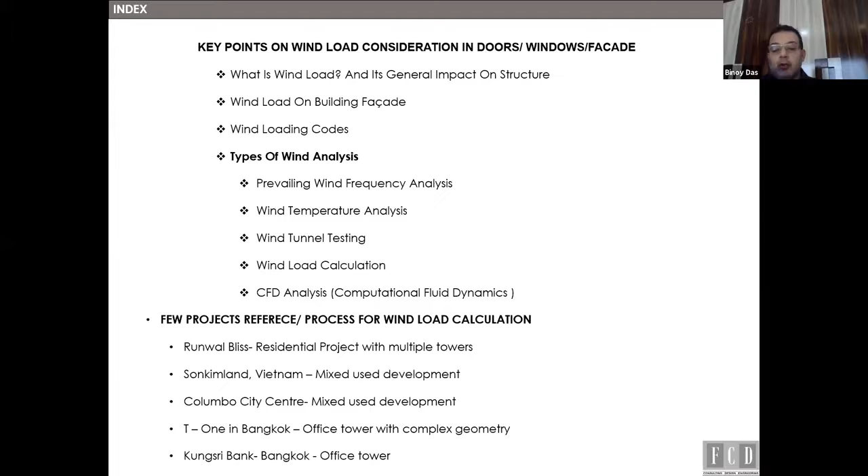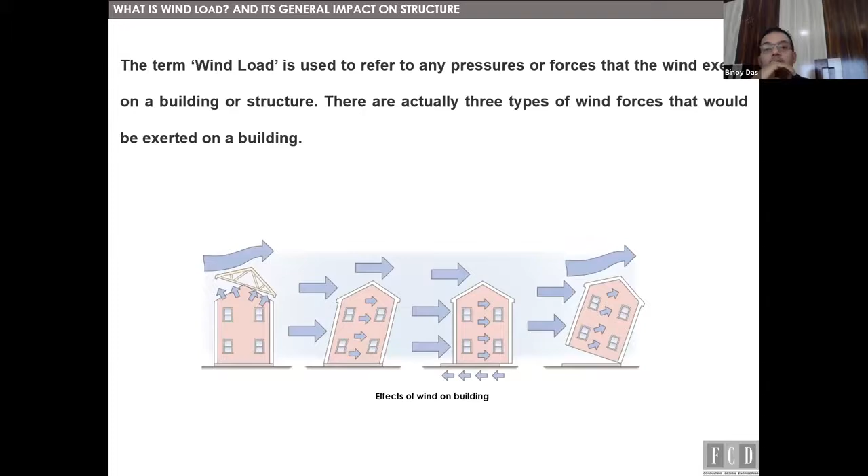So first, I would like to just quickly get through what wind load is as a definition. It's a pressure or force that the wind exerts on buildings or structures. As we are all aware, there are different types of wind action: uplift wind load, shear wind load, and lateral wind load.

How does uplift wind load work, what are the factors, and what are the areas where uplift wind load has to be considered? For example, with a building with a roof, a canopy or dome structures, how the uplift wind load reacts and the behavior of the wind load has to be studied. Secondly, shear wind load. If you look at the diagram here, the shear wind load is the horizontal pressure or force that can act on the wall or vertical elements. So these are different cases we need to consider when we calculate the wind load.

Lateral wind load is mostly on the structures, but of course there's the facade, when you talk about a continuous facade that's integrated and connected to the building structure. So these are certain factors we are aware of. But I just touch on these lines to give an idea that the calculation of wind load is not only a theoretical calculation; there are different elements required to be considered when designing the right wind load of a building, and that is required by the facade systems.

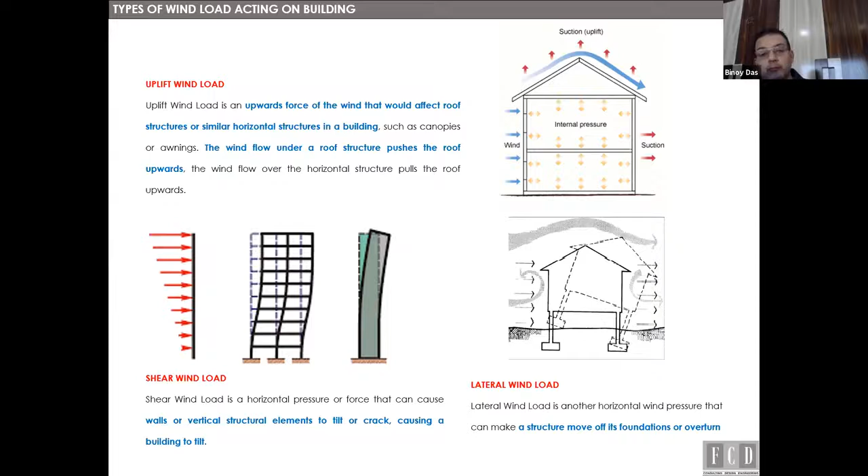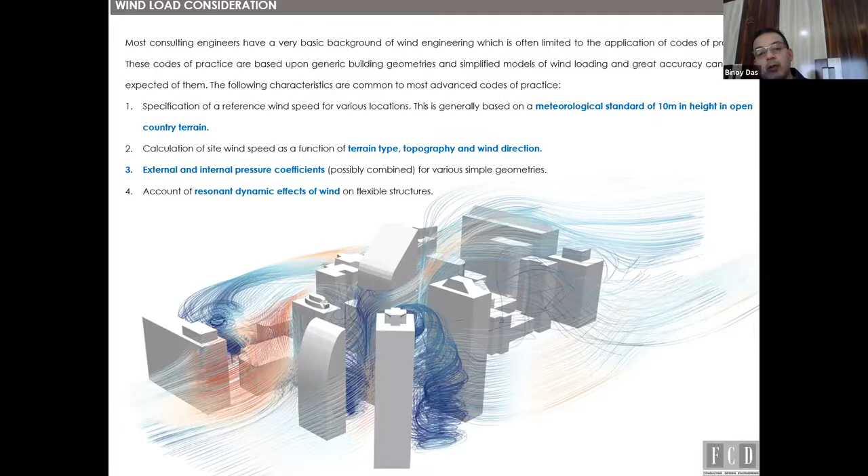Okay. Let's say the nature and occurrence of high winds. For example, in the high wind performance of office towers, a large part of the poor performance of the envelope is due to inadequate design. Sometimes when we design the facade, if the wind load calculations at certain heights or certain areas are inadequate or not proper, there is a lot of chance of failure in the facade systems: structural failure, water leakage, and many other failures which can cost the project owner, the building owner.

So while designing the facade, the wind load calculations, the different criteria and categories, and the factors required for those conditions and locations are important. That's why I wanted to highlight that when you design for wind load, the design should gather all relevant factors in terms of wind temperature, prevailing winds, and how wind tunnel testing helps, which I will come to in the next slides.

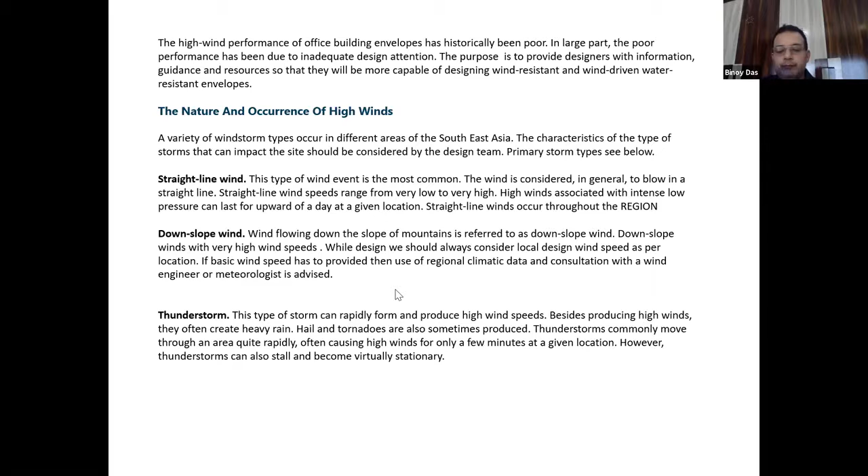For example, in hurricane conditions, there's a system of spiraling winds converging with increased speed towards the storm center, during hurricanes or typhoons. For example, in the Philippines, whenever a building is designed, I guess there are more than 15 to 16 typhoons there.

So while designing the facade, we have to get the data or information from the local code of practice, and discuss with the structural engineers how their structures are designed, because the facade is a part of the structural building elements. So it's the whole movement of the building with the facade. So during a typhoon, what are the different conditions that need to be applied while calculating the wind load?

For example, in normal areas where the wind speed is not much, like Bangkok, the wind speed is probably 25 meters per second. In those areas there are different options for a cost-effective design solution based on zoning of the wind load. But in a hurricane or typhoon zone, like in a few areas of the Philippines where tremendous wind load acts on the building, we have to go with the highest wind acting on the building. So the design should always be based on the highest wind load consideration.

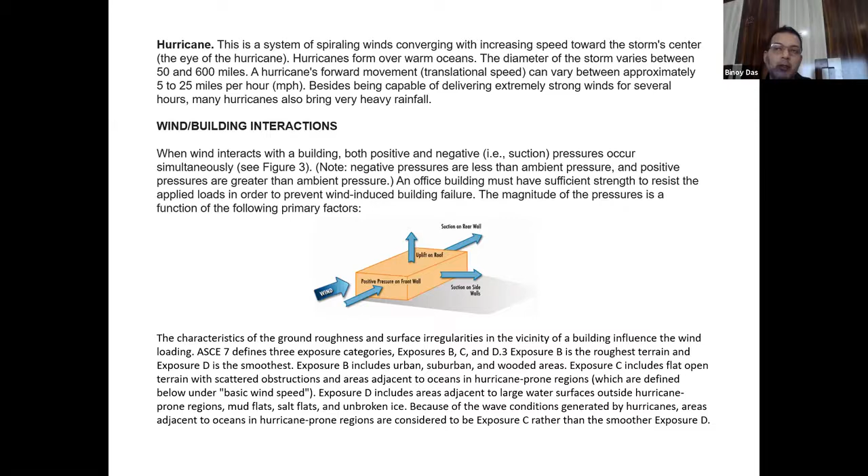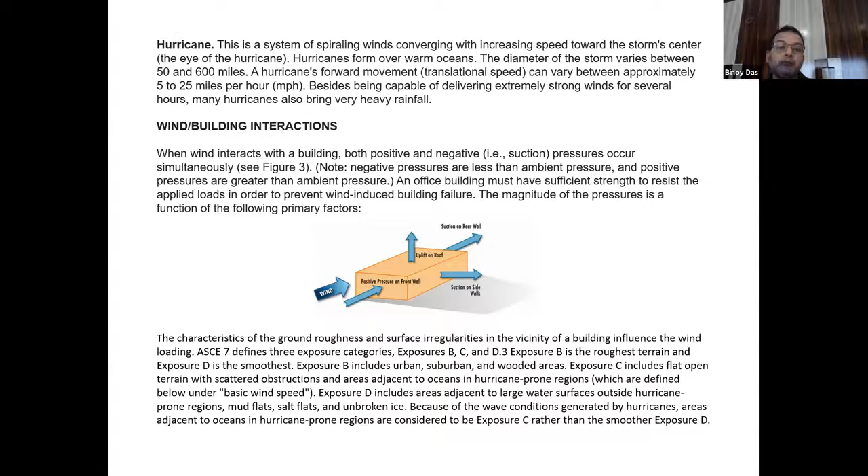So these are the generic ones. Why do we actually strongly recommend a wind tunnel test? Because there are different ways of calculating the wind load. There is a conventional way: we take the wind speed of, let's say in Thailand, Bangkok, 25 meters per second. So we take the 25 meters per second, we take the terrain condition, we take open or closed conditions and all the others as part of the code of practice. And then, as per the codes, we calculate the wind load.

But when you have a wind tunnel test, you get an accurate result of the wind coordinates acting onto the different areas. That's why I said wind pressure calculation is a significant factor in the design of the facade, especially for towers, whether office towers, shopping malls or residential. So any facade which is continuous, especially for a high rise, has to go through the wind tunnel test when there is a high rise or multiple towers clubbing together. That gives you the wind tunneling effect, the different kinds of coordinates.

But when it comes to the developer's mindset, when they ask how much a wind tunnel test costs, it mostly costs $35,000 to $40,000. So sometimes, to save that cost, they do not go for it. There could be different reasons also, but what we come across is: okay, we need to save the cost, so why can't we go for the other conventional way to design?

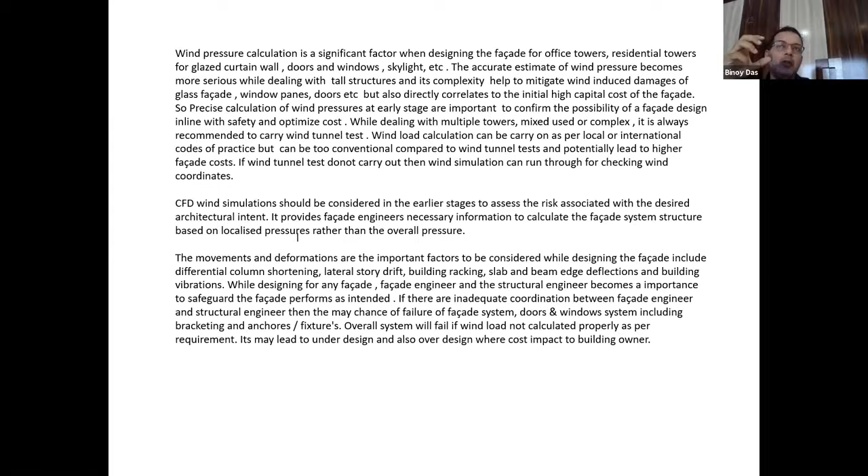We have to go with zoning where the wind acts at each level, maybe plus 10 meters, 50 meters, 100 meters or 300 meters. Different zoning where the wind acts on the surface conditions and on the corner conditions. So we have to take all the coordinates to come up with an understanding of how this facade will be designed, because the geometry of the facade or the building changes gradually towards the height of the building.

Now, as we all know, because of the facade designers, because all this practice, technology and analysis and software are available, the architects have a free hand to go for any kind of design complexity. So the complexity of the design is as per the architect's intent, as per the concept of the building.

We as designers have to make sure we achieve the intent, but also check whether the intent shown is structurally feasible in terms of safety, in terms of the system which is fixing onto the building, which is structurally adequate, where the building moves along and the facade also has to move with the building. There's an equal allowance of movements into the facade, which is a continuous or maybe a floor-to-floor glazing system.

So these are wind simulation methods: CFD wind simulation, then you have the wind tunnel test, and then the conventional way. We can go with any of the design methods, of course, but it's always better to go for a wind tunnel test if possible, because it carries on as a prototype to understand and give the correct results of the wind and the coordinates on that.

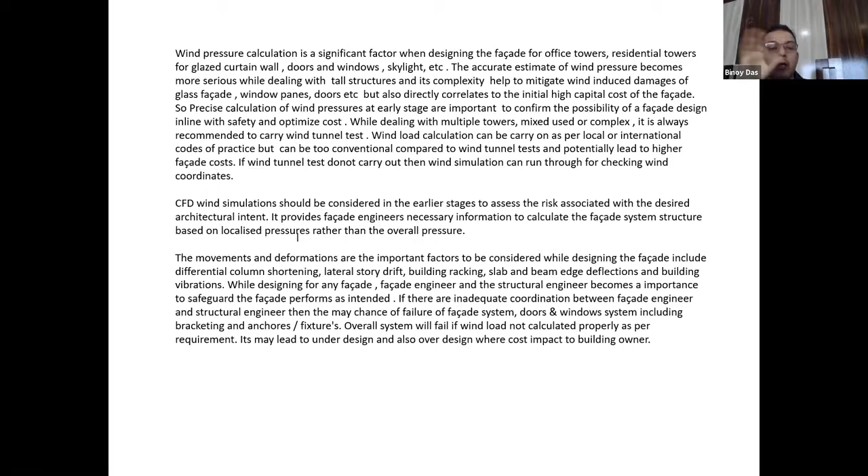So this is what I would like to present, and I'd like to convey this message of why wind load calculations with different types of analysis factors are important. Also, for the wind calculation, we go through the code of practice.

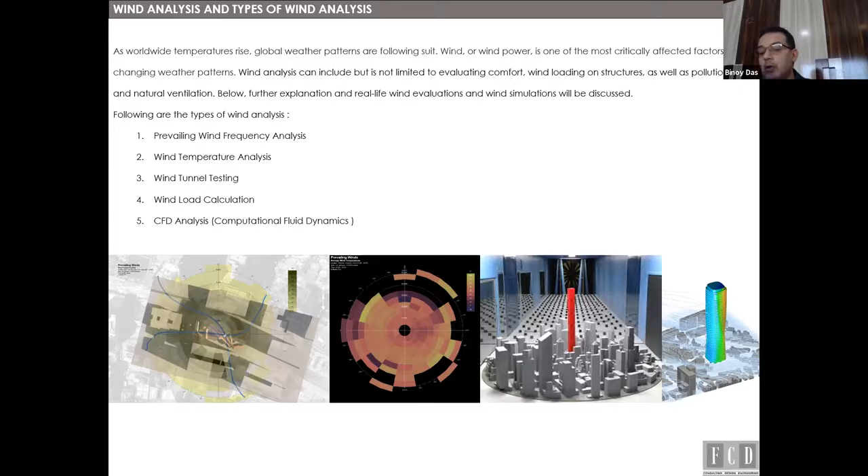Let's consider the conventional way. We go through the code of practice, but there are other certain parts also included, like the prevailing wind. Prevailing wind is a wind direction from one place to another, so how the prevailing wind can also help out. How the wind temperature also brings heat, which links to your total analytical factors. Wind tunnel test, which I've already explained, wind load calculation or conventional - but prevailing wind and the wind temperature I would like to come up with a more brief on.

There are many things on wind we can keep adding on, or we can keep researching, or go through whether it fits designing onto the facade, or it can be considered over here.

So I think if we know about wind rose, wind rose is a representation of the direction the wind blows in a given location. You can look at different data into northeast or different directions attached to the next direction, like west, east, west-north, or southeast, south-north. So these are all the directions where the wind goes, as shown in the diagram.

So this is mostly what happens, and why you need to know this, because wind load direction is an influence for the ventilation performance of a building, where probably with a courtyard, if those courtyards are located perpendicular to the wind rose diagram, that can summarize the distribution of the wind and its direction over the day in a defined observation period.

So we should know how this can affect different types of facades. As I said, the architect's intent has different ways to play with the facade elevation to make the building look nice. Nowadays, residential projects mostly in the Middle East have continuous facades because they have to be thermal-proof, due to the heat outside being 48 and inside needing to be 24, so it's an insulation factor. They always try to go with continuous facade, where probably in between they create pockets, and then have sliding windows inside, and a glass railing.

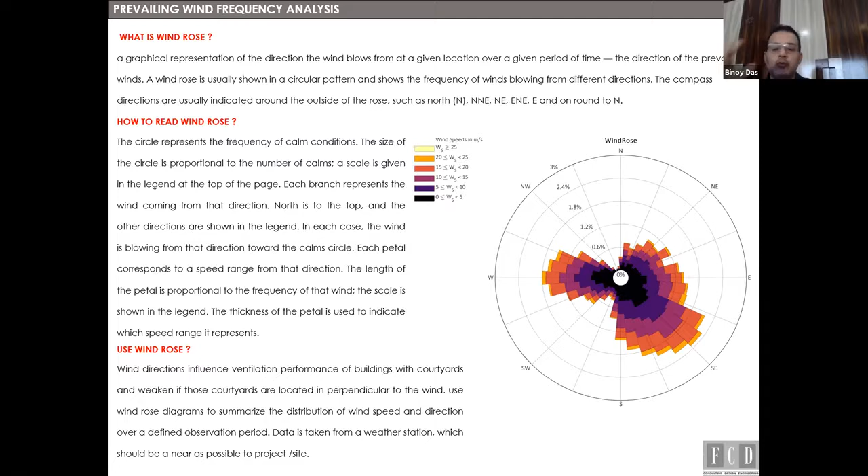So there is always a sense of needing to understand wind comfort - how the wind comfort is over there. For example, when there are certain areas where you have walking or standing areas, or pedestrian, or maybe sitting areas, mostly sometimes you have an open court sitting arrangement with open restaurants kind of thing.

Mostly in Southeast Asia, there's a common scenario where you have an outside sitting arrangement and a tall building above you, and there's a wind blowing over there which feels uncomfortable. So these are all things we need to consider.

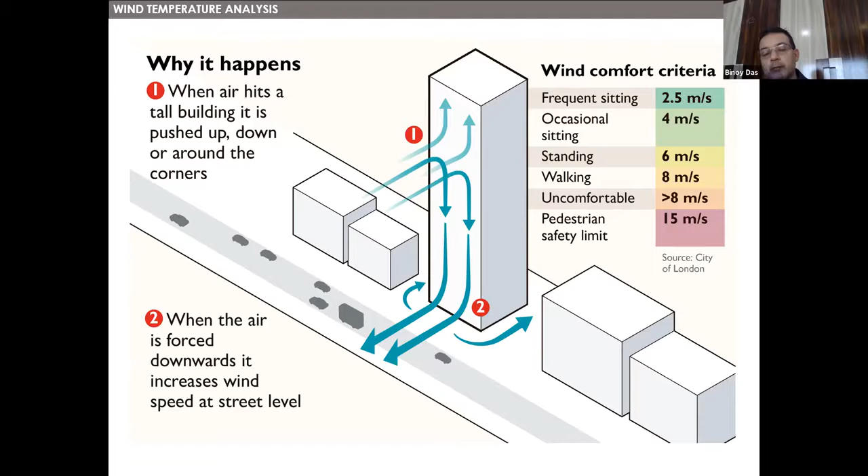As I mentioned already about wind tunnel testing, why it is important - with a wind tunnel test using scale models, we can get different wind coordinates and design based on that. Mostly this applies if it's high-rise towers or multiple towers situated together, and you also have to consider the nearby surroundings, whether it's closed or open conditions, how many similar height buildings are there surrounding it, whether it's in a very densely located area. All this helps with wind tunnel testing, and it could bring more economical design wind load coordinates from the tunnel test.

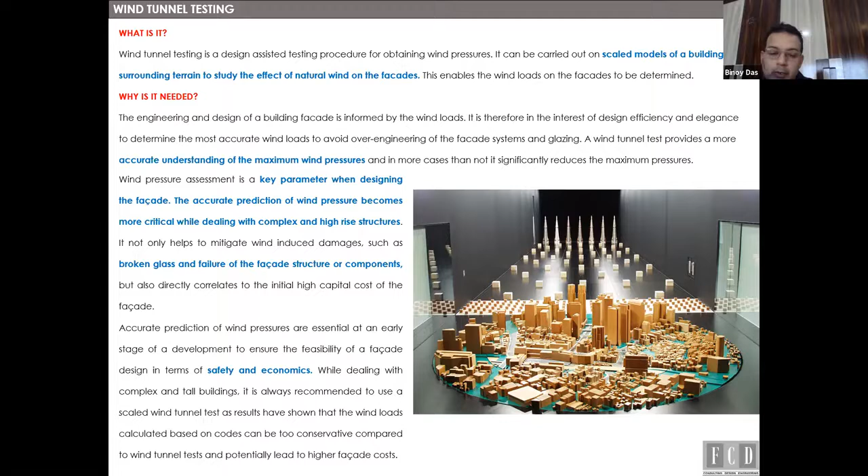If not, then as per our experience with developers or projects, they go with wind tunnel testing when there are multiple towers, but when it's a single tower 60 meters or 70 meters high, they always intend to go with wind load calculation instead. That's also okay, that's fine, but it's always better to go with a wind tunnel test - that's what I would recommend.

For example, in the AHU room, mostly we come up with ventilated louvers. What kind of louvers should be designed will depend on the air exchange ratio, and also the wind acting over it, and how it circulates in that AHU area - that's the analytical part we need to come up with. Though air exchange ratio is MEP's scope of work, we also have to understand how wind flows, and when there are different corners acting onto the wind of the building, how this wind acts, so that the facade design takes this into strong consideration in terms of detailing.

So that it can last longer as per the design intent.

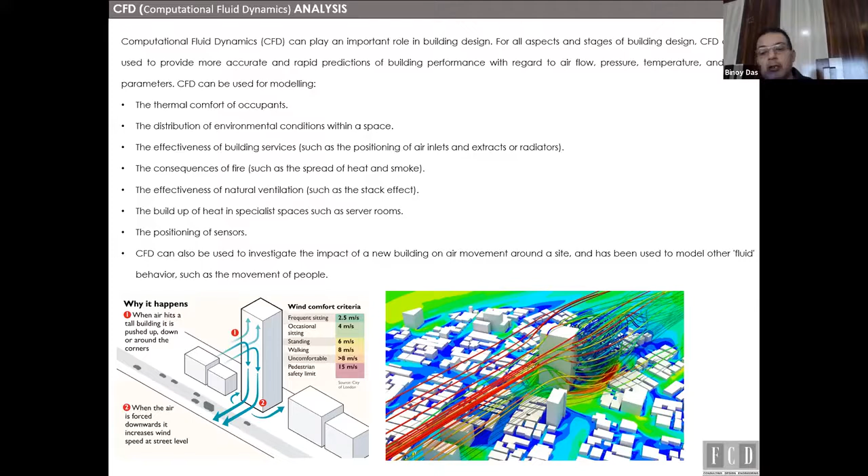Wind temperatures, yes, it's the same, like how the wind acts and how the heat flows through it - that's again a certain analysis we all know about.

I'll just quickly go through the other slides also, because maybe these are all theoretical and tutorial kind of things which we come across, but we should take the importance, consider, and seriously think of taking action on why all this analysis is important - we have to implement it on the project. For example, on projects where we propose all this analysis, we try to explain it to the building owners.

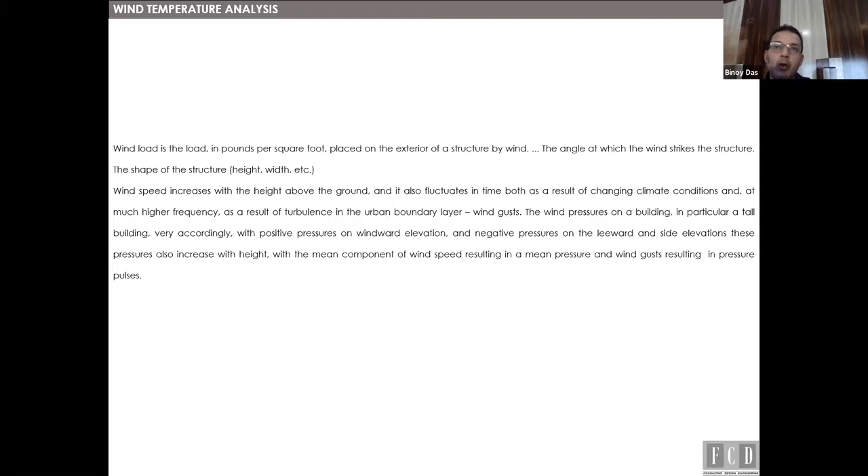Because then probably they will understand the importance of the requirement of wind tunnel testing, which is cost. There is an internal process of analysis, that can be done internally by qualified engineers or facade engineers who understand the facade not only in terms of detailing, but the whole situation of how the facade behaves in terms of temperature, wind, movements - performance. We have to take it all together before we get into certain design, and then we can further discuss with manufacturers like Schüco, Technal, maybe different manufacturers which can support us, support to design the right systems, or follow our design which is required for the building.

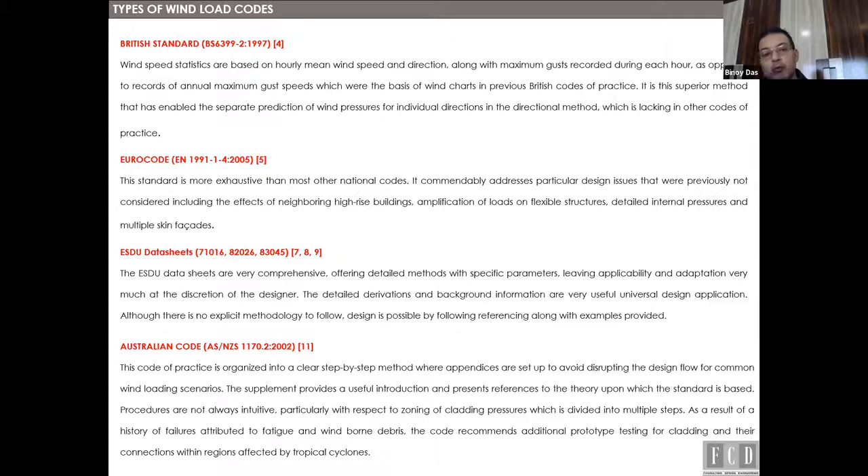Different codes of practice, yeah, different codes we use. I will not go into the detail of these codes, but yes, we have to use the local code of practice. Now I will come up with some slides of a project which has been done in Asia in terms of residential.

So I divided into two categories because it behaves differently - for the residential, wind impact on the residential building. There are many factors when you design for windows and doors, and calculate the wind and design for the window. So mostly the failure we come across is in terms of designing of the windows.

Let's say balcony windows - we have a sliding track, four track or three-track sliding, with interlocking profile. If the design is not done properly based on the wind load acting over there, there is water leakage. There is a whistling sound in between the interlocking profile, which at night you cannot sleep because of the wind passing through it. So the whole design elements, and then the shutters - window shutters, sliding shutters - which sit onto the track.

The thickness of the profile, the design of the window should be proper, otherwise the roller fixed there may not work, or tomorrow we cannot move the sliding windows - we'd need to give external force to open them. So there are different issues, about the wrong or inadequate calculation of the wind load on residential factors, which is purely the main criteria for designing of the windows.

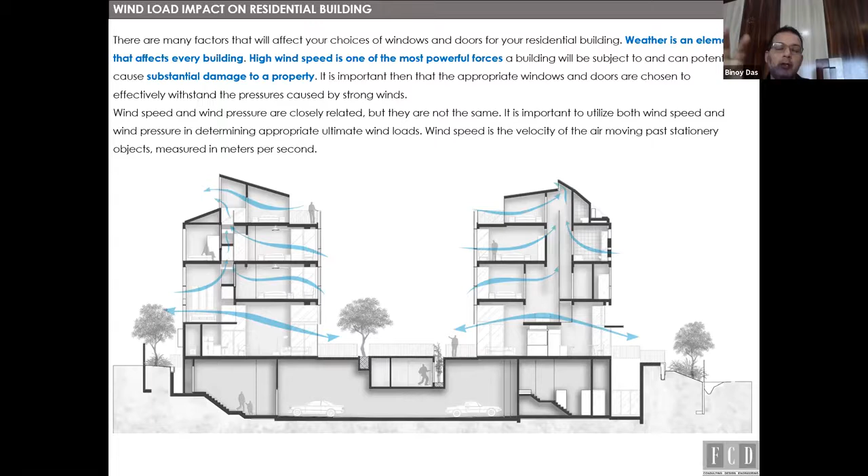Because for a window there is nothing much into it - if it's a casement window or a window walling system, there is a performance. For any residential towers or residential building, the system is the main concern - your glass, the rollers and accessories which can move, and your drainage, how it works onto the track. Like when water gets into the track, there has to be proper drainage for the water to come out. So these are all based on your design factors, and it directly relates to your wind load calculations.

So here I would just go with three slides, three projects - it's very small, a few slides of that.

This is a project in Mumbai, and whoever is from Mumbai knows about this project called Nathani Heights. It is a 324-meter residential tower, located in the heart of Mumbai, a very crowded place, densely populated area with very tiny spaces, because there is not sufficient space for this kind of high-rise project to stand, since nearby is a railway station - a very busy railway station in Mumbai Central - and all the surrounding area has no space.

And the challenge over here is that the facade, if you look from the elevational point of view, is symmetrical, it's the same. The design intent of the windows, the design intent of the railings, you look at the elevation, it's one complete design, one single design. But there is a challenge over here: this building was before a slum.

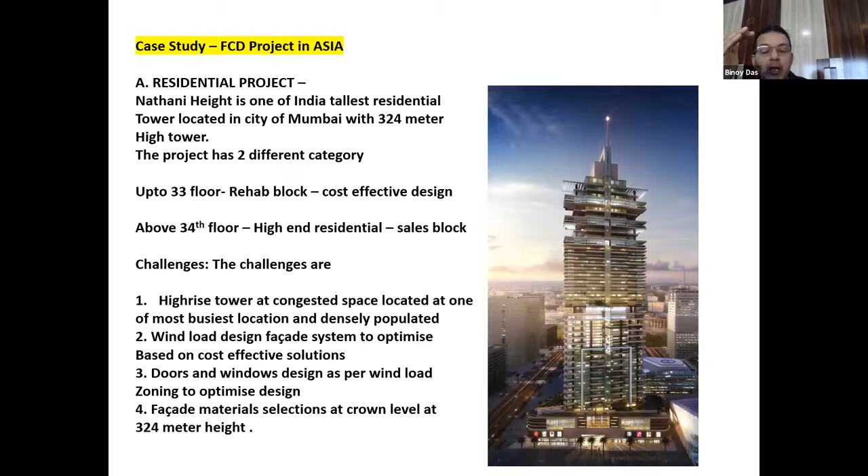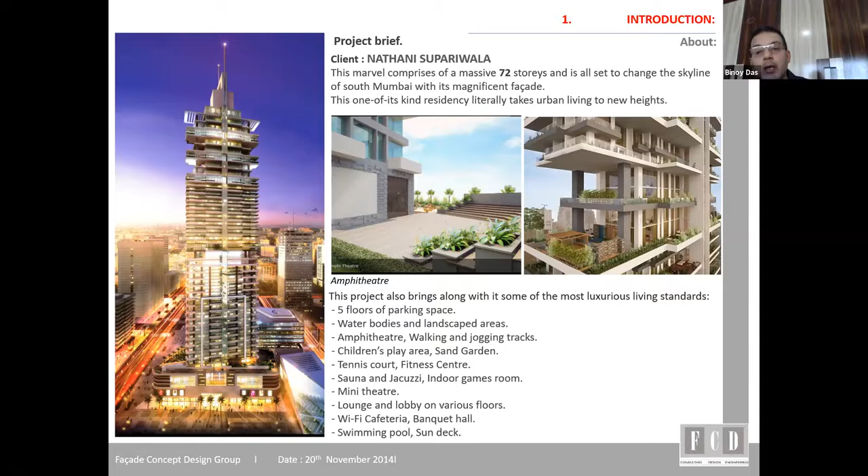And secondly, over the crown areas, where there are different facade elements, the wind acting on those areas is tremendously high. So how do you handle the design of the facade over there, where the luxury floors, the high-end apartments, are? There's wind acting over there. I'll show you the

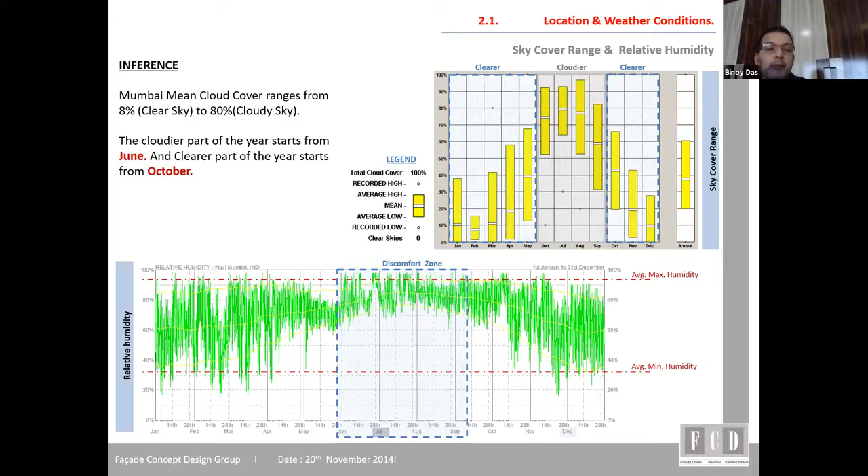We can also try to play with the aluminum profile, but aesthetically we have to make it symmetrical as one design, because it's the architect's intent. So the elevation depth on the front side of the window can remain the same, or if it slightly varies, at such a height it will not be visible. But based on the zoning of the wind load, the window can be designed as per the heights of the residential tower.

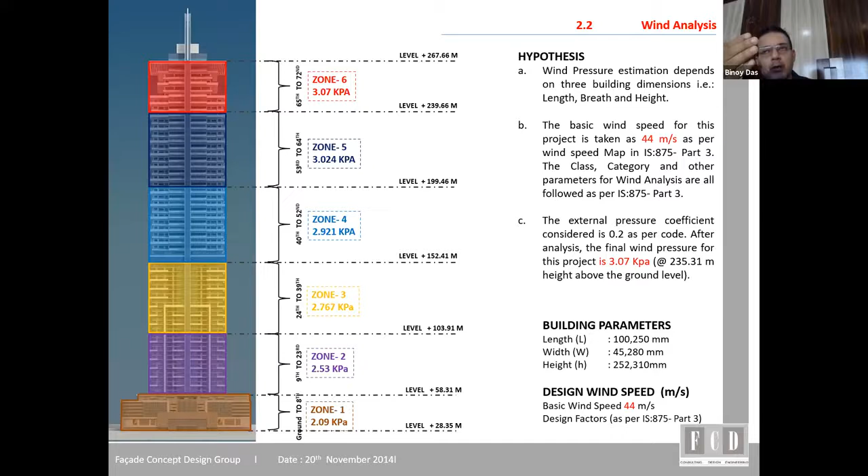And yes, there are different facade systems. This is more into the detailing, so I'll just quickly run through this. When you design these brackets, these are all related to the wind load at that height, or when it's a continuous facade. So you have to design the base structure or substructure, which connects the building and the cladding, to be adequate to withstand the wind load per the structural

requirement. So the thickness of your profile, the thickness of your brackets, the dimensions of the brackets, what kind of nuts and screws, all depend on the wind load calculations. Sometimes what happens is we take the maximum wind load. A few years back, the highest wind load at 33 floors or maybe 150 meters high was taken to design the lower part of the facade, for example the retail area, which does not have a continuous facade.

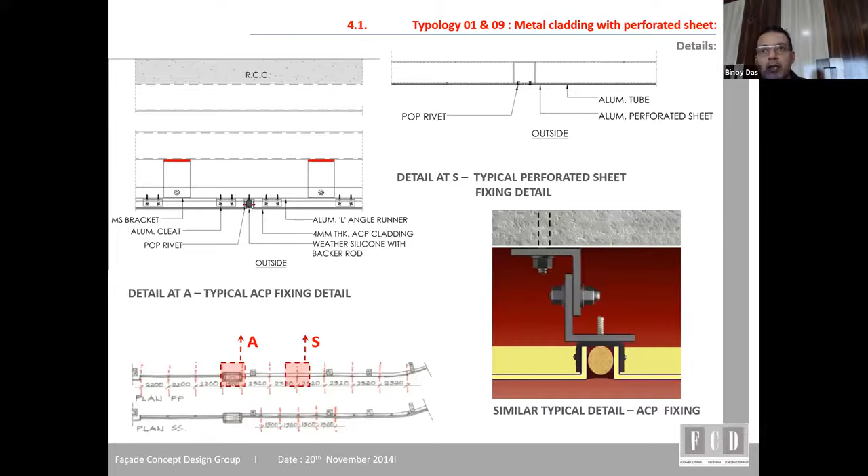So we can optimize the facade design with respect to the wind load, your system design, your substructure design, your thickness of the framing, thickness of the glass, everything can be rightly placed. So we should not worry about whether our design is over design or under design. If it is under design, it's a risk, and if it's over design, it adds to the cost. So it's very important to design the right wind load to get all the design elements of the facade.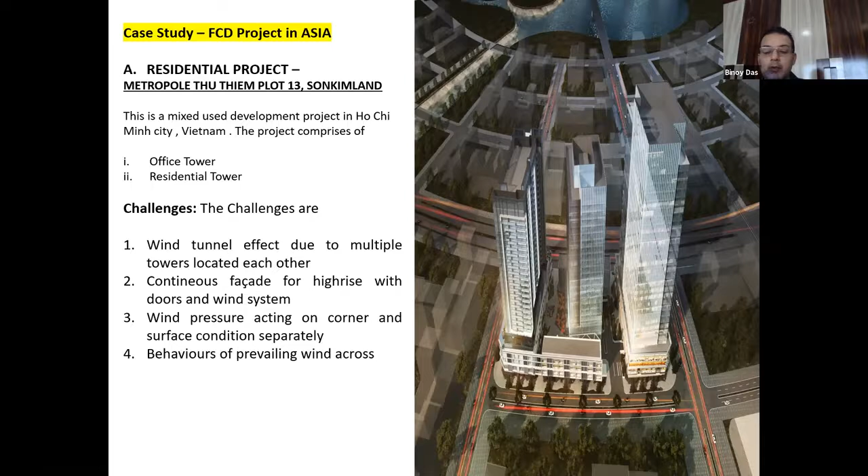So what will happen on the retail and the corner areas, and then on the corner side, how the facade design should withstand the actual wind load acting onto that, and how the design can be done. So this is commonly the same practice. If we understand the base of the design elements, we can follow the same sequence of designing for any building.

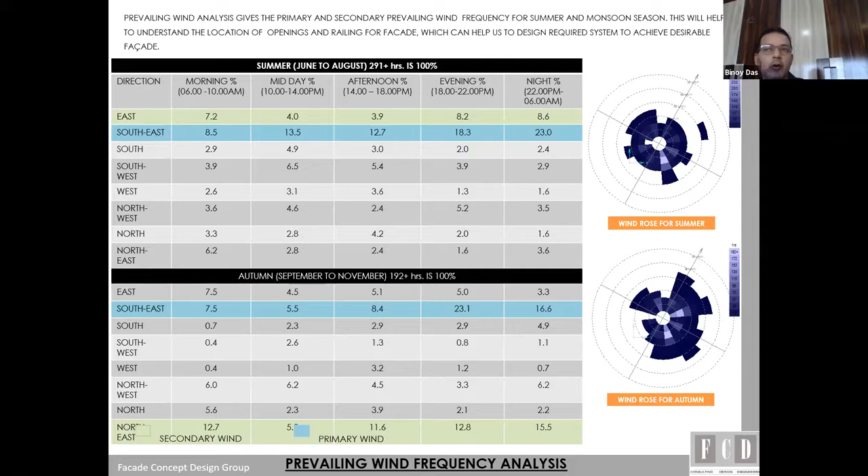Let's say for the prevailing wind. The prevailing wind in the different monsoons we should understand, because that also goes back to your water leakage. As I said, where there's wind, where there's air, there's water. So we have to see to it that the facade which has been designed and installed at the building is free of water leakage, free of air leakage, or maybe the thermal leakage.

If it is a continuous facade, the whole elements of the facade design, when you go with the performance, your thermal transmission value, when you calculate it like ETTV or OTTV, that also leads to your total heat gain inside the building, and it further goes to the MEP guys to design the air conditioning. When there is a facade leakage, then the whole calculations will fail. If we design energy efficient buildings, or whatever we design, and it fails, then it becomes a very huge operation cost, and that has to be borne by the developers.

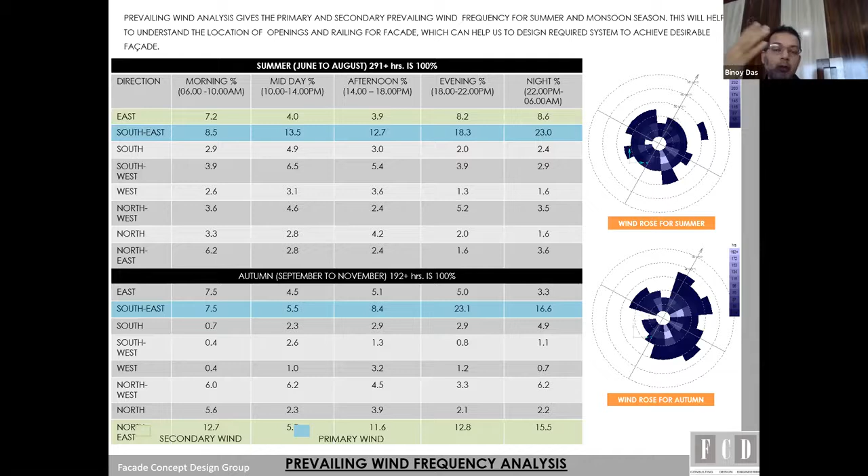So we have to be very careful in designing, and also follow the design when we fix it onto the structure, onto the building, and the right detailing should be in place. The fabrication and the installation should be proper. A certain methodology should be followed while installing the facade with a technical expert. So that's why I believe nowadays many countries always try to appoint a facade consultant to help remediate all these issues which could come later in the future.

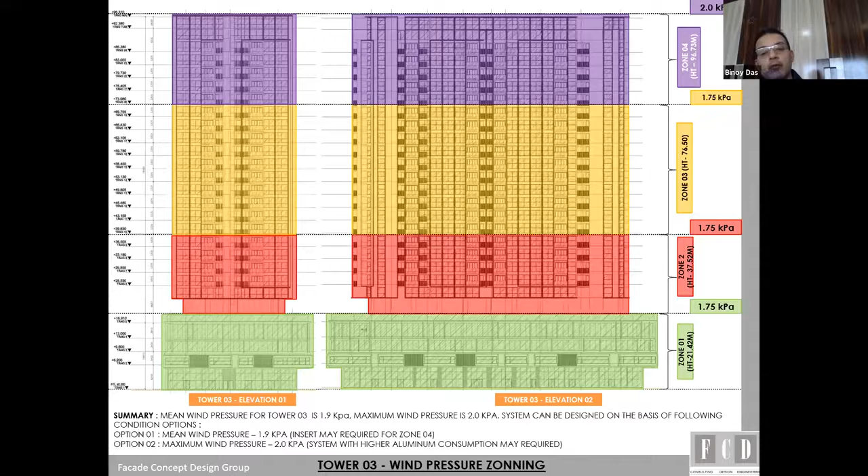So okay, this is how the wind changes with height, normally the wind calculations in the conventional way. Then how about the thickness of the glass? Let's say, for instance, we don't calculate the glass thickness. We don't know what wind load is acting onto it. As I said, the engineer is very important at the beginning stages to analyze all these things. If not, then someone may come and propose, I need a 25.52 mm laminated glass. But why do you need 25.52? Who has calculated? Who has checked it based on the wind load? What is the wind load acting on it?

So there should be a certain initial exercise done, either from the developer side, or from the architect side, or if there is a facade consultant, definitely the facade consultant helps in calculating the right design, the right thickness of the product. And this could also help finalize with the facade contractor the price of the facade, the cost of the facade. Developers should not worry about paying extra, which is not required to be paid to the facade contractor.

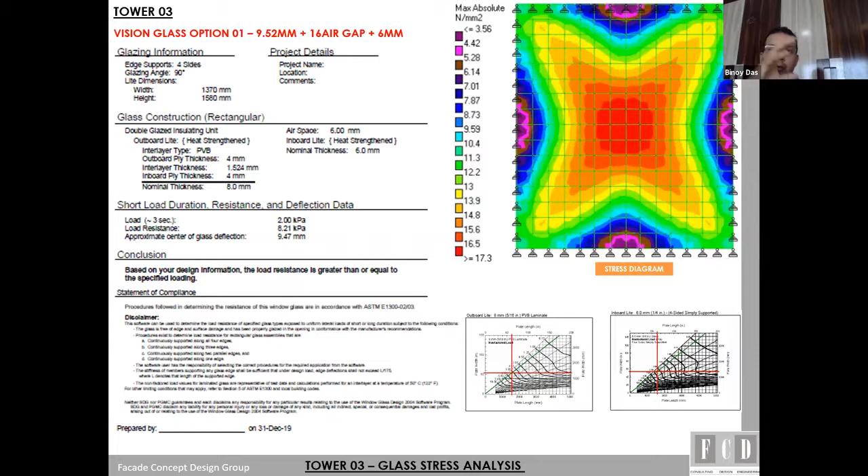I'm sorry to say that, but yeah, this is very important, where you have to understand the right design should be placed into the building. It should not be overloaded, or over expensive when it's not required. So that is why the design, or the involvement of a facade consultant or an engineer, whoever the client, developers or architect want, is very important, so they can bring them on board to study and go through it all.

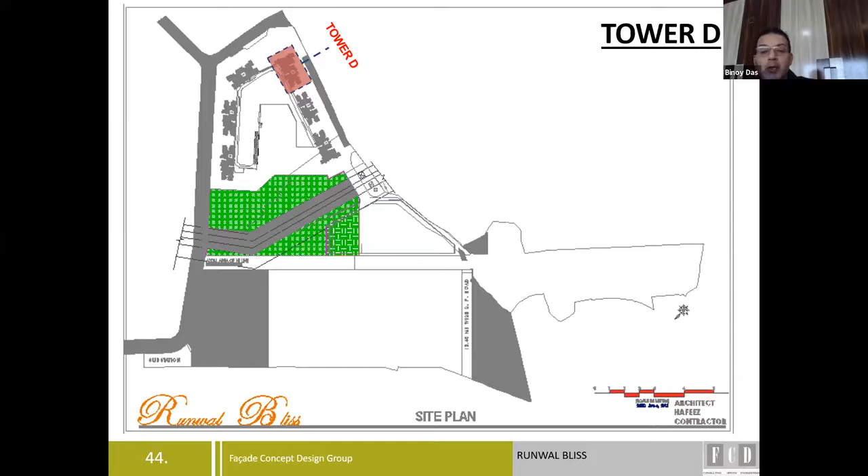But just quickly run through. This is another one, which is the multiple towers. So if you look at the ground over here, see there are different buildings which are situated. It is in Mumbai again, and you have a huge site plan where again your wind rose diagram, how this flows, and I would show you this.

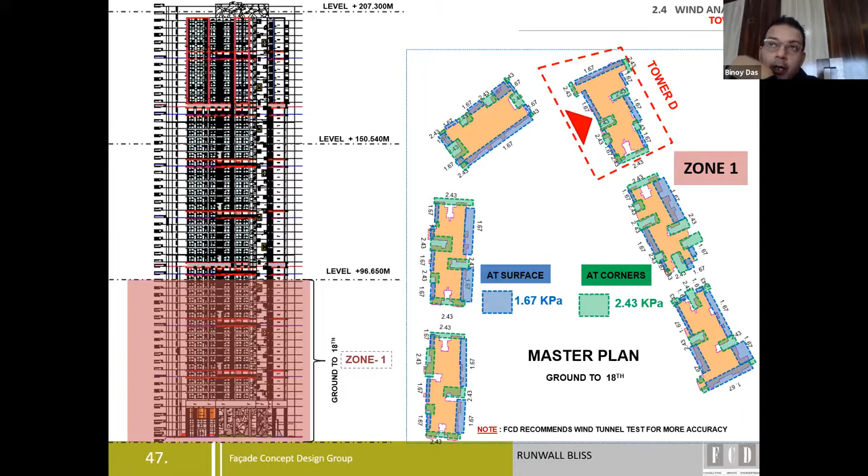You look at the wind coordinates which have been calculated, and in the different corners you have a different wind load. Wind load acting over here on the surface, different wind load, and sometimes this helps also to optimize the designing of the facade. It can reduce the aluminum consumption. It can reduce sometimes, when it's floor-to-floor, the thickness of the glass. So there are different ways the wind load can help to optimize the facade.

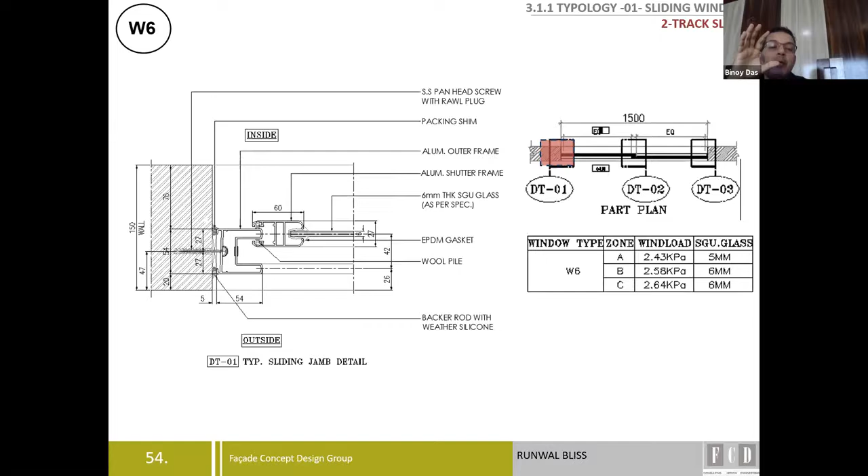So this is a few window elevations, where I just like to quickly draw. Okay, designing of the facade, how these members will be designed. So this purely depends on the wind load. If you look at this over here, the A, B, and C zone, the wind load is different. We go for, say, 5 mm glass, 6 mm glass, 6 mm glass for the same window, because it's floor to floor, and the elevation doesn't make much difference in terms of slight tweaking on the thickness. You can save on that.

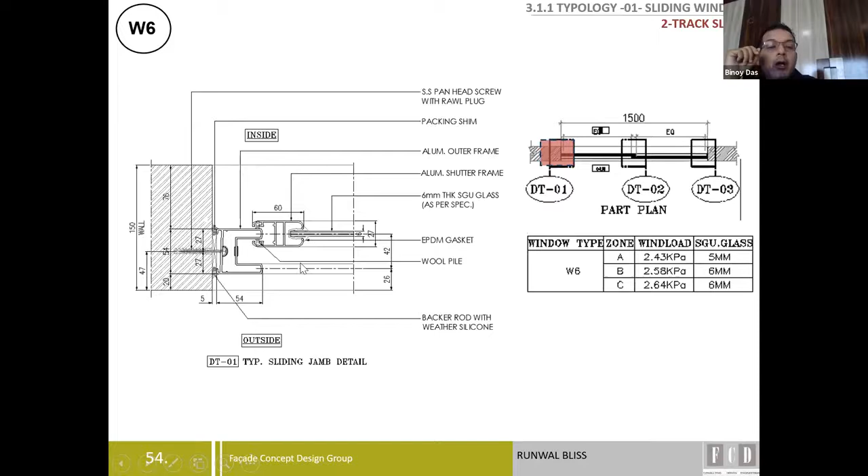And then the performance works: if the design is proper as per the wind load and you have good detailing, you can also protect from weather, like water seepage, as already explained before. Interlocking section system, if this design is proper, then it's rigid. So whatever wind is acting over here on the glass and this composite, it will stand the wind. Design is as per the wind load calculation.

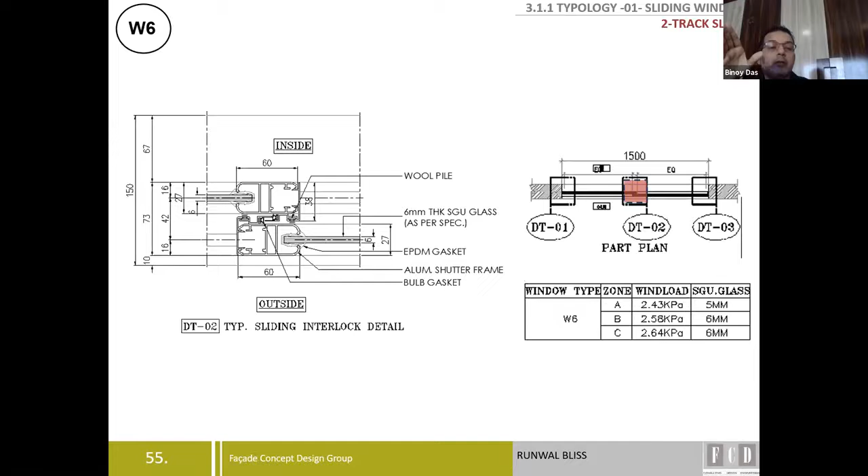And your interlock section, which is this one, is a very critical area where wind is passing by, which makes a whistling sound. It's sometimes very annoying. If we find this kind of thing at night, you cannot sleep because of the high wind acting through these junctions.

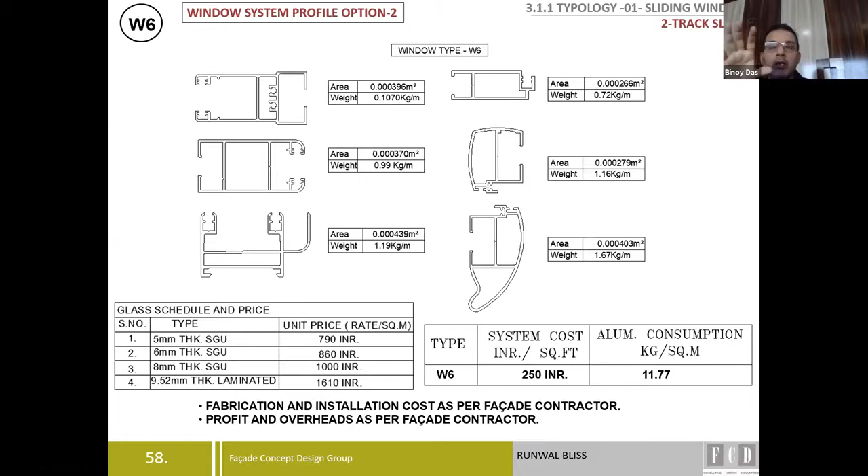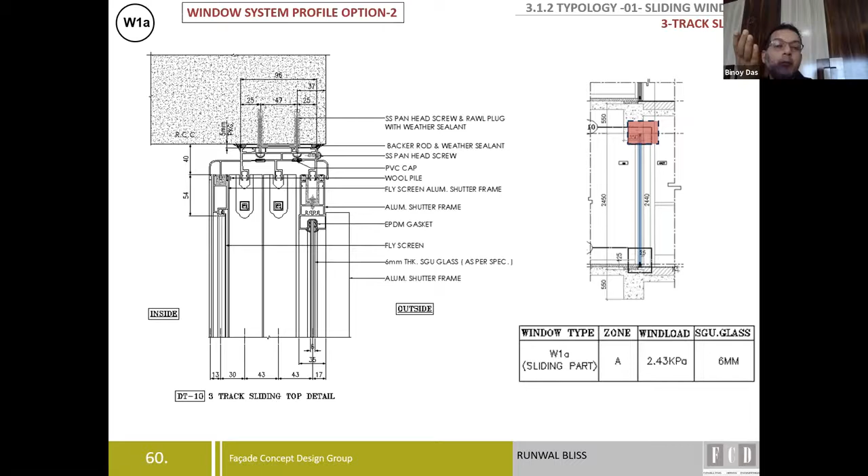Coming on to the track section, different profiles can be designed. So the window can be designed, or it can also take the system supplier design. It depends on the selection, but whether you select a system supplier or your own design on the facade, if you have the basic design intent, then you will definitely bring everybody to apple to apple. So over here, this is a small profile which is added to protect from the rain coming inside. And also the system which is designed has to be up to standard with the wind load requirement.

You see at the track, the whole shutter sitting over there, the roller acting. If the window is not designed as per the wind load acting over here, then the roller will not work. The window can fail in terms of glass selection, section profile and all. And ultimately there will be huge water leakage and air leakage, and then you have to replace the windows. So in residential projects also it's equally important to take up the design at the beginning stages along with the architects.

Then the structure also can be relooked, where the window is sitting, whether we need a sub-sill, or maybe an add-on profile, or we have to change the methodology of the window sitting in the openings, the position: what happens when the window is flush outside to the structure, if we install at the middle, or if we install flush inside. So there are different ways the performance and function will be affected.

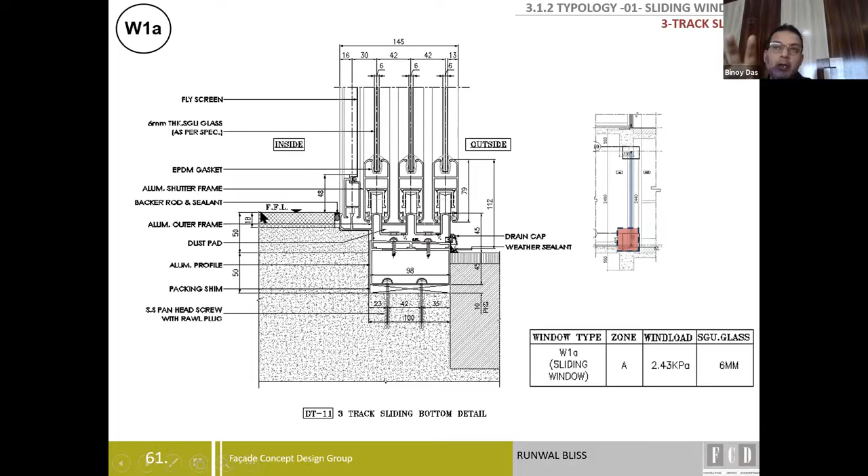So how far the screw of this window profile has to be from the structure edge. In concrete, there is always a coverage of 25 mm where a screw is not advisable. 50 mm, even not advisable. 75 mm from the outer surface of the structure, it can be done. So the fixing also matters, where the screw positioning should be. How many screws, at what distance center to center, whether you go with 300 center to center or 600 center to center. These will all depend on the complete design solution. So that's why the window is also a very important part of any residential project, and it should definitely be taken into consideration.

Now coming into office towers or any high-rise continuous facade: as a thumb rule, the facade area would be 25 to 30% of the built-up area. That's huge if you rightly design the facade. The wind acting on the continuous facade we consider separately from the window. So in our consideration of the wind acting here, we can go with the zoning of the wind load.

And also how do we optimize when there's a cost constraint on the facade design? The developer has a budget already, for example, $100 per square meter for a facade system or unitized system. So we have to look at that budget while designing. With the wind load acting on the different zones, there are different ways to optimize.

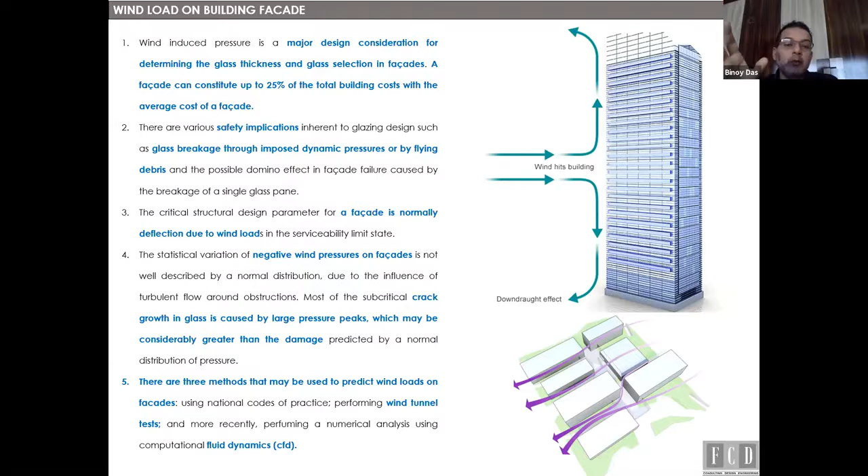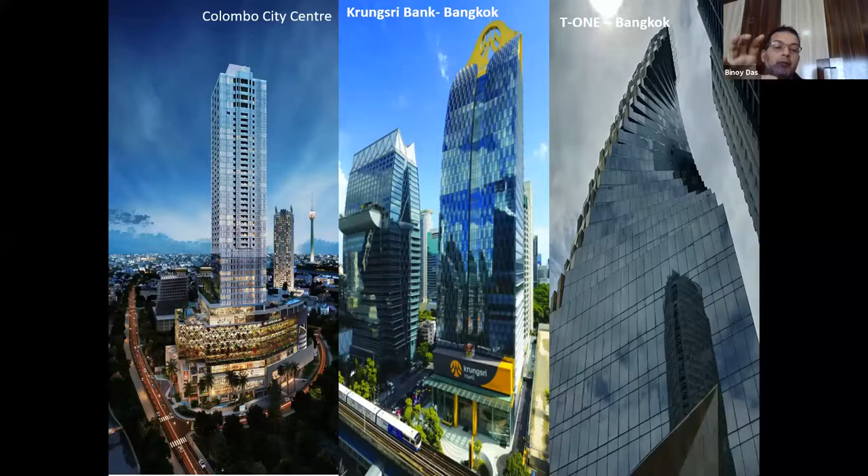And if you look at the podium, the car park area is a huge metal screen with cladding, 50% cladding and 50% opening, a 3 meter by 3 meter diagonal shape screen. That has to be fixed onto the structure. So with the wind acting there and the whole reactions onto the structure, you have to have close coordination between the structural engineer and the facade engineer before you come up with the member sizing or the design intent.

So just quickly going through it, these are the 3 projects. I've taken them as examples because I think we are from different regions.

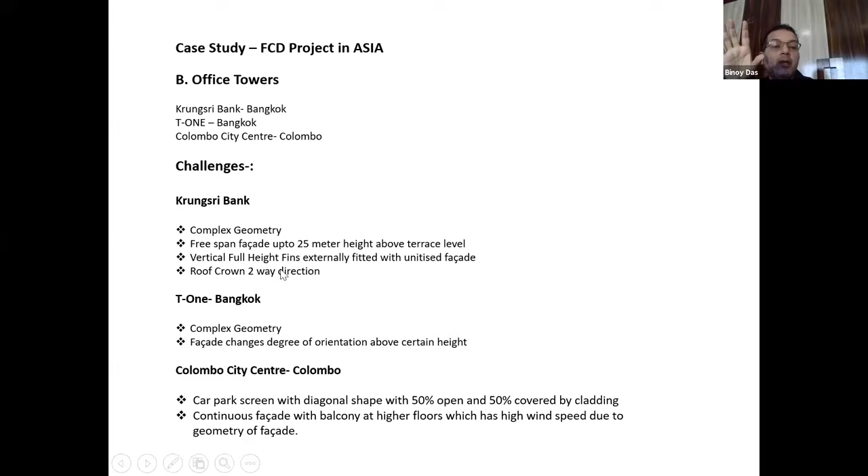So Krungsri Bank: complexity, free span 25 meter high above terrace, vertical full height fins and the roof crown. T-ONE is the same, Colombo City Center. I already explained that it is a process where, for the wind calculations, we go with the zoning of the wind load. And with zoning of the wind load, if it is a cost-effective design solution, we may take the intermediate mean of the wind, for example, and then we design the facade.

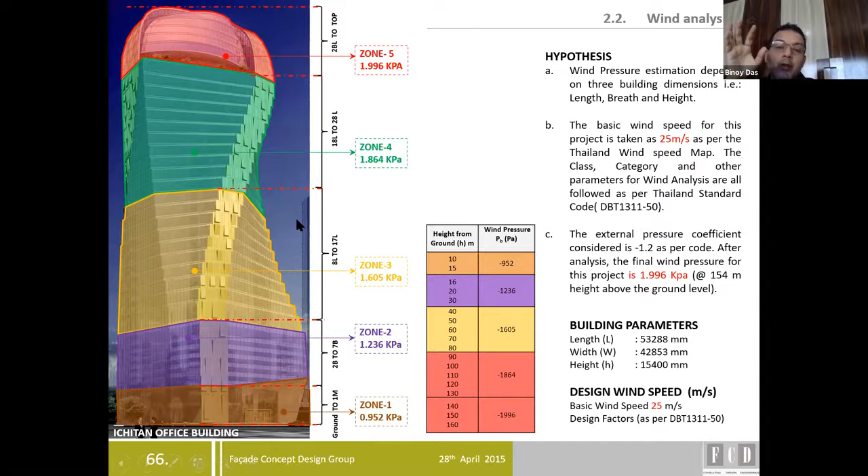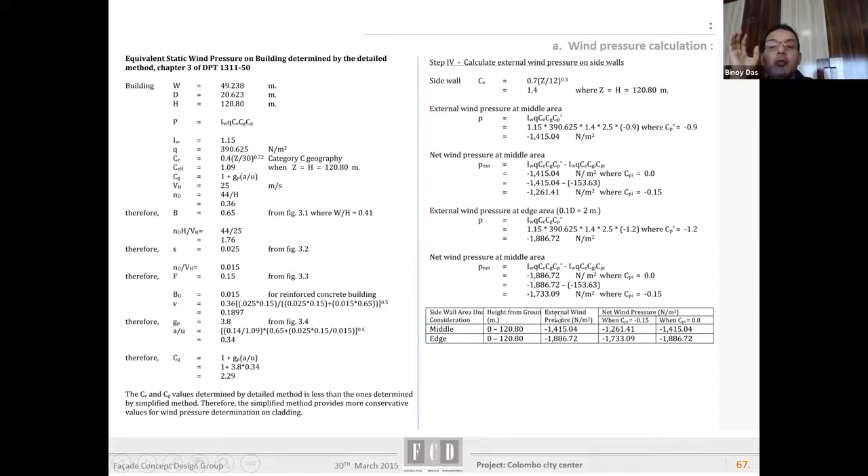And above the mean, we can go for a reinforcement, maybe mild steel, hot dip galvanized reinforcement inside the profile, in a composite way where the aluminum consumption of the facade can be lowered, and structurally it passes through. So as I said, there are different ways for engineers to project the design intent. So you have DPT, like the Thailand code of practice, and how these calculations worked out, because we had gone through the wind load calculation in a conventional way.

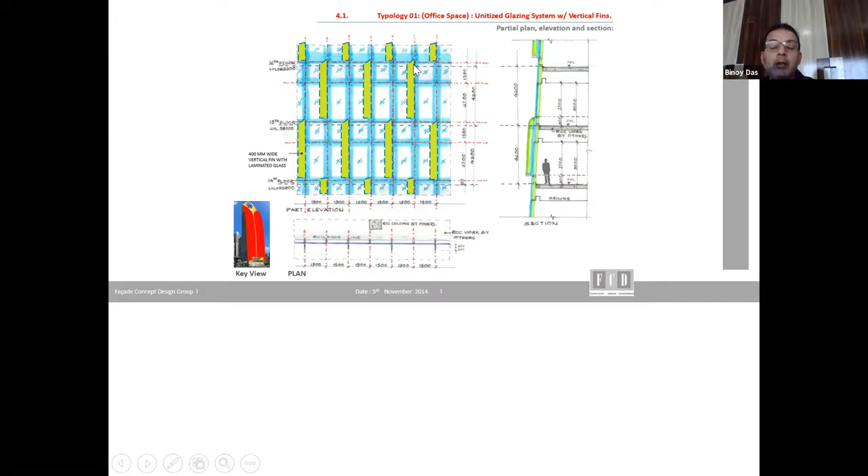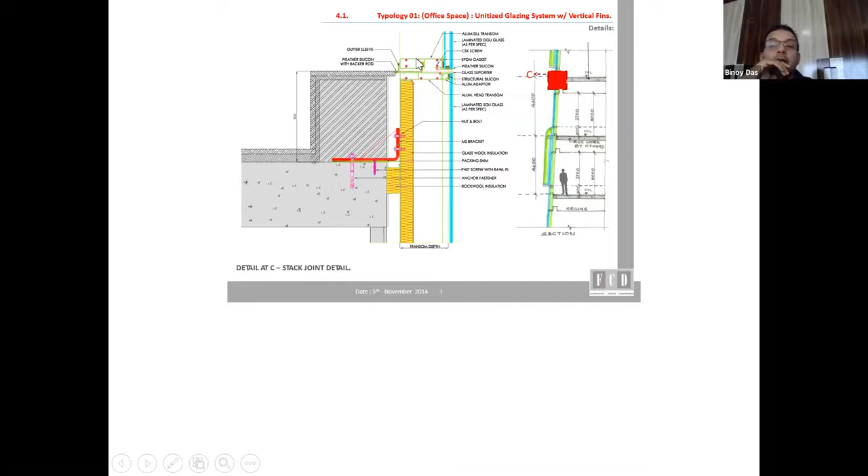And look at the design over here. These are the fins, which are full height, panel to panel. So it's almost 4.2 meters. I think, Bo, you are aware of this project. It was quite challenging at that point of time, because it was glass before and then it changed to the cladding aluminum fin. So how the stack joints work here for the unitized continuity. All the bracket design and stack joint design will depend on your wind load calculations and the wind load factors. So I just quickly have drawn it.

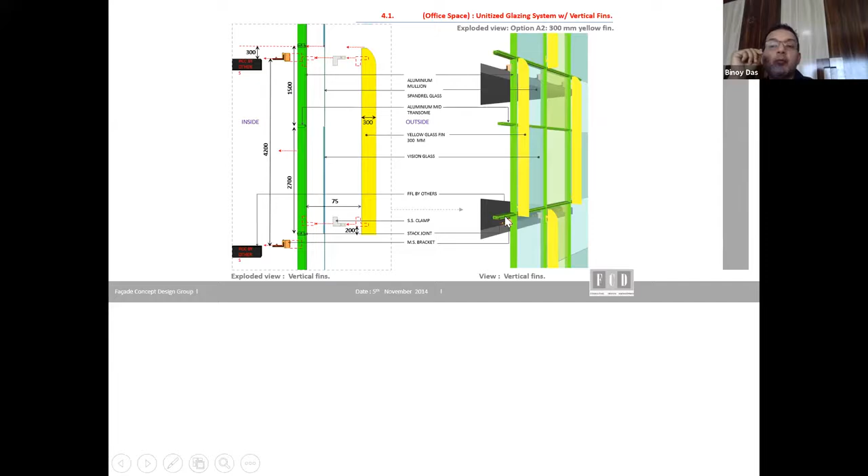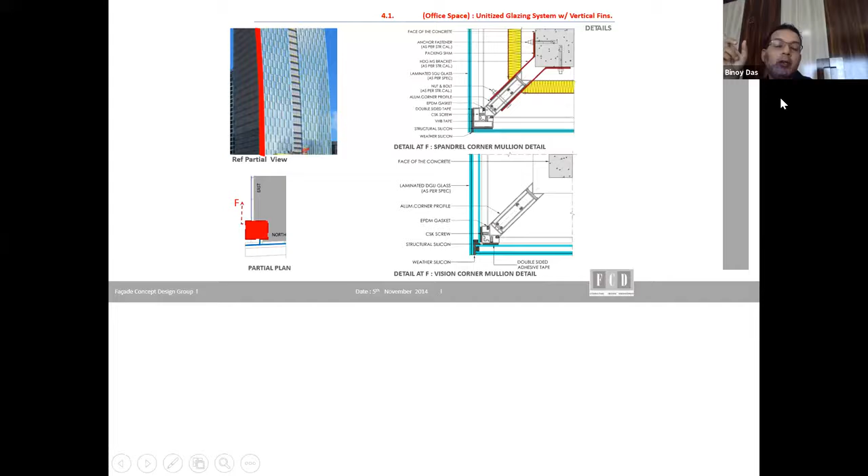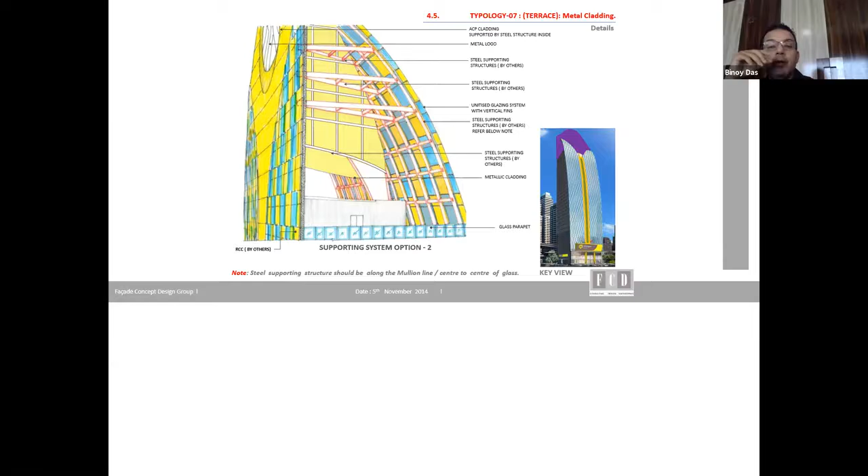This is the facade with the steel, and the backside is a 25.52 meter facade, and you have a different cladding form shape. So this is very critical and very challenging, how the design has to consider the wind acting. So it's important for the design of the facade system, how the system will be designed for the wind load, with respect to your structural calculation, your structural requirement, and your performance. How this system can protect from air, water, and heat, and how the designed section can withstand the wind load and other movements.

So this could be a baseline the owner can come up with. They can invite Schüco, they can invite Technal, they can invite anybody, or they can invite the facade contractor to come and match the specification or the section which is required. Because this is a design of the system done considering all the analytical parts: thermal analysis, structural wind load, everything. The glass is calculated. So these are the design elements which can be followed.

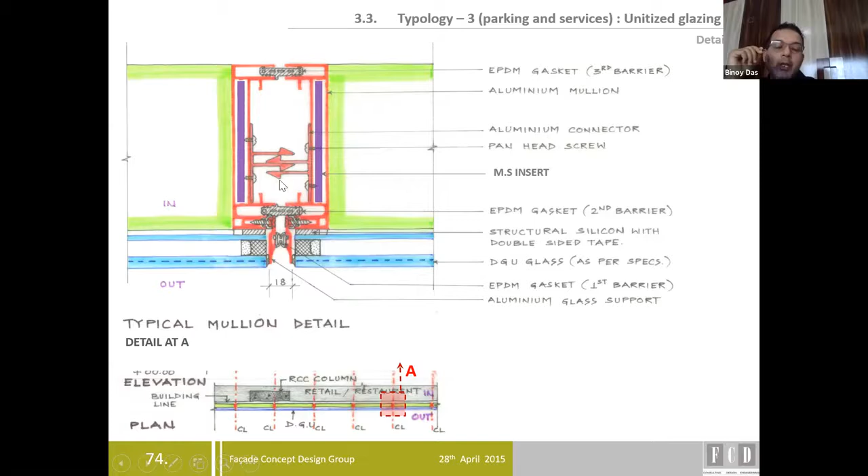So I want to say that it's very important to consider all these factors while we get into the design and decide something, and then take it further with any supplier to build the facade. Then we will be sure there won't be any water leakage, no problem on the structure, and we are safe for many years. How these corner junctions and profiles behave. The seal part is important: if it is not designed properly on the stack joints, there will be a failure on the stack joints, and there's a huge risk on the unitized system because it's a continuous facade.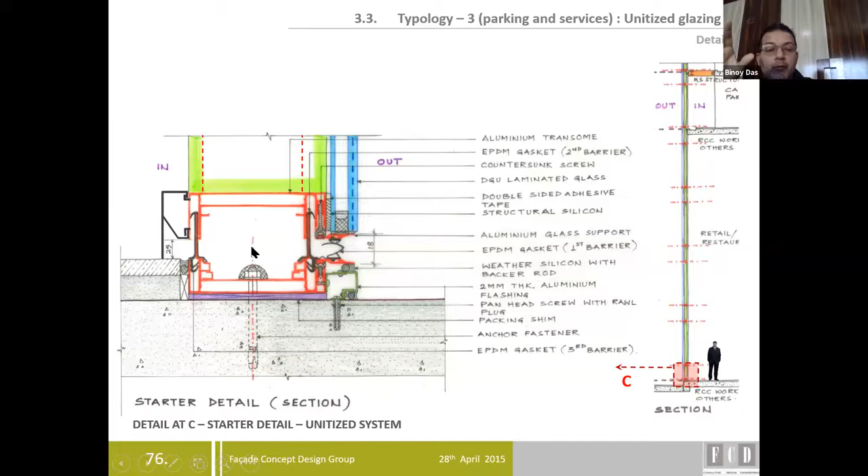And if something is damaged in the frame in between, it's very difficult to replace the unitized framing. You cannot, except the glass. So you have to be very careful to decide a system. Before you decide a system, we must run through all this analysis. So this is the two-step part where your facade is going in and out. How do we take care of this? What glass thickness do we need to put? How will the facade move? How do we hook onto the structure?

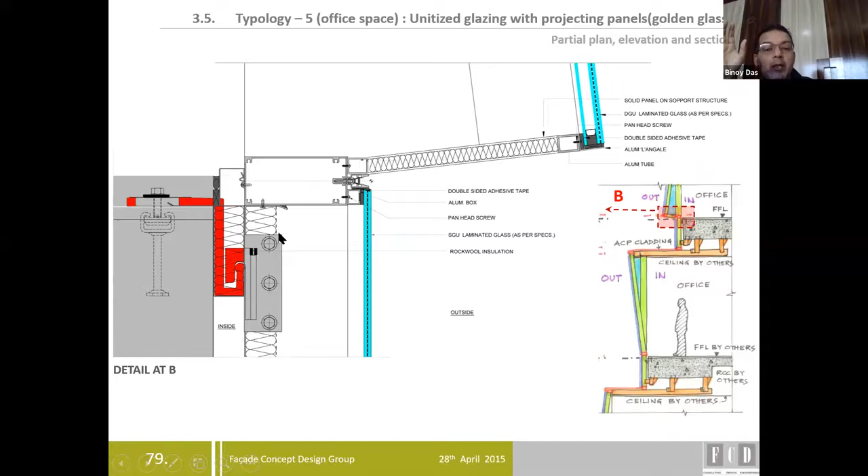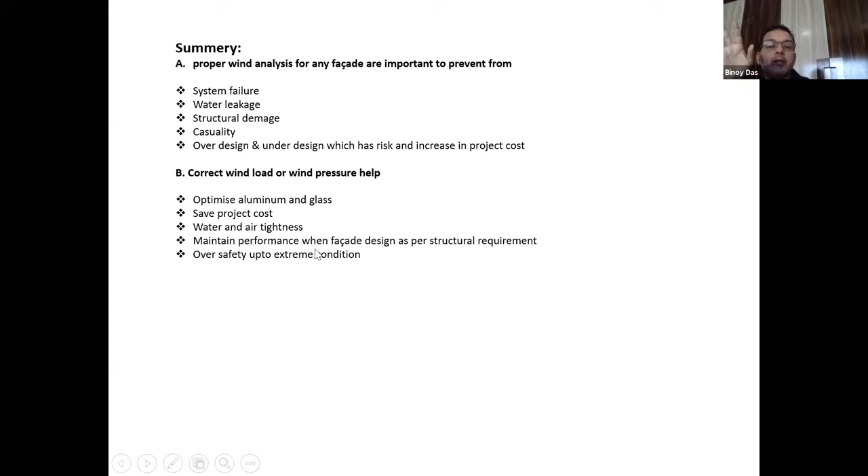So at the end of my presentation, I would like to say that proper wind analysis on the facades is important to prevent system failure, water leakage, structural damage, casualties, and over-design or under-design. Correct wind load can help us optimize the aluminum and glass, save project costs, maintain water and air tightness, maintain performance in facade design, and ensure safety in extreme conditions. So I would like to conclude my presentation over here.

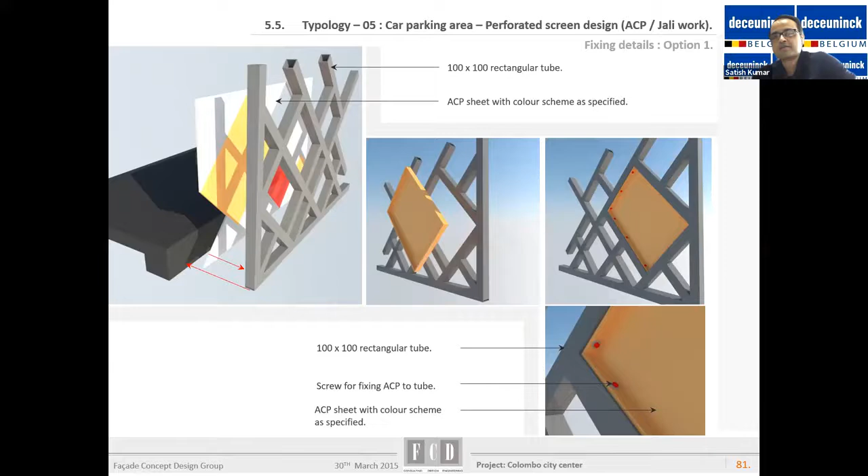Thank you, Binoy. Thank you very much. It's been really very enlightening to look at the different concepts of facade design. You took us from why wind load calculations are required, what wind tunnel analysis is and why it's important, how cost can be optimized by zoning, and your project references across Asia were really interesting, especially the complex facades you did in Bangkok with the 25-meter crown at the top. So I think that was very, very interesting for the audience.

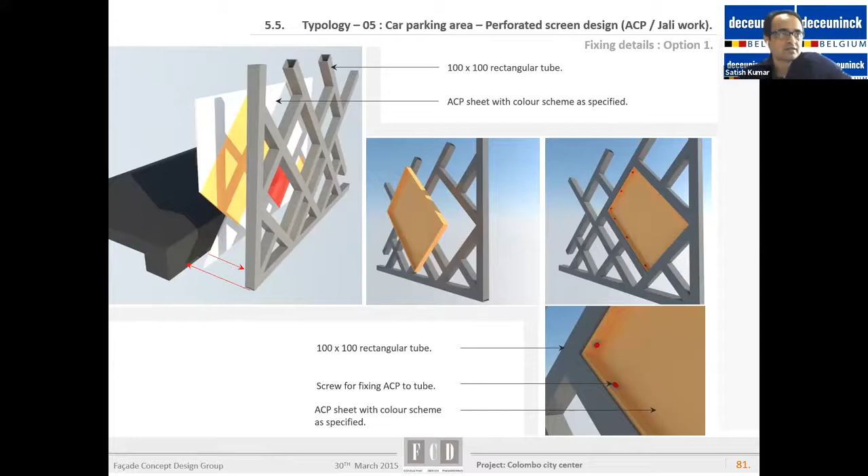There have been a couple of questions. If you permit, I would like to go into the questions so that we can try to answer some of them. There's a question about how to calculate the IY for the transoms, because wind load generally we're talking about in mullions, but what about the transoms? How do we calculate IY for the transom? Is it just the weight from the glass at the top, or wind also?

Actually, the transom connects between, let's say, a unitized system. So the load from the transom is distributed to the panels, to the mullion, and then it comes to the brackets. So it's definitely a dead load of the glass which is acting over there.

Right, there's another very interesting question. I think you covered it in your presentation. Irfan asks how negative wind load is generated, especially very high negative wind load, like negative 5 kilopascal, which is specified in a couple of tests. So why a negative wind load? I think in your presentation you covered how the wind moves up or moves down when it strikes a building. Probably you can answer, Binoy, how negative wind load comes into play.

See, for wind load calculation, both positive and negative wind load have to be considered. It depends on the zoning, it depends on the location. Let's say when you do a test, for example a facade test in a laboratory, a structural test, we go with positive and negative wind load as per the standards, like the AAMA standard. So the negative wind load and the positive wind load are both part of the requirement.